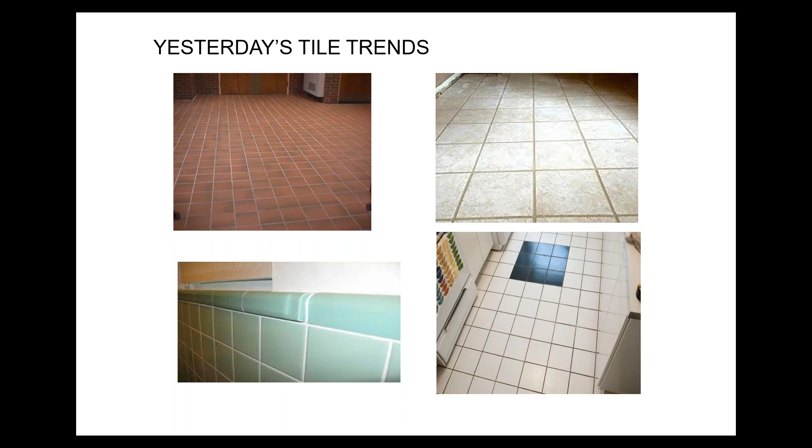When I got my start in our industry, tiles were much smaller. I remember our first 13 by 13 floor tile project, and we thought the designer and owner were out of their minds with these big tiles. Back then, all tiles were much smaller than we typically see today. The trend is to bigger and bigger tiles. We commonly see 24 by 24, 24 by 20, or 24 by 48, all the way up to these 5 foot by 12 foot and beyond.

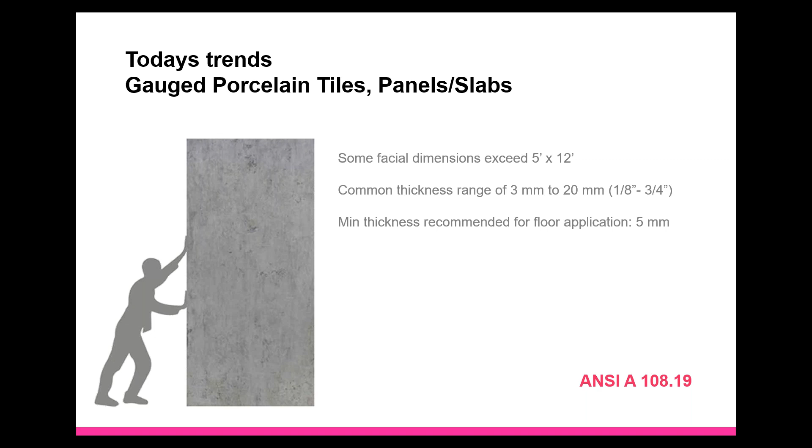Additionally, tiles are getting much thinner. As technology has improved, the prints are more realistic and the tiles, again, are getting much bigger. As these tiles get bigger, the need for a flat substrate is even more crucial. Recently, I dropped by an NTCA workshop where they were working with huge art glass panels. Imagine just how flat that substrate needs to be.

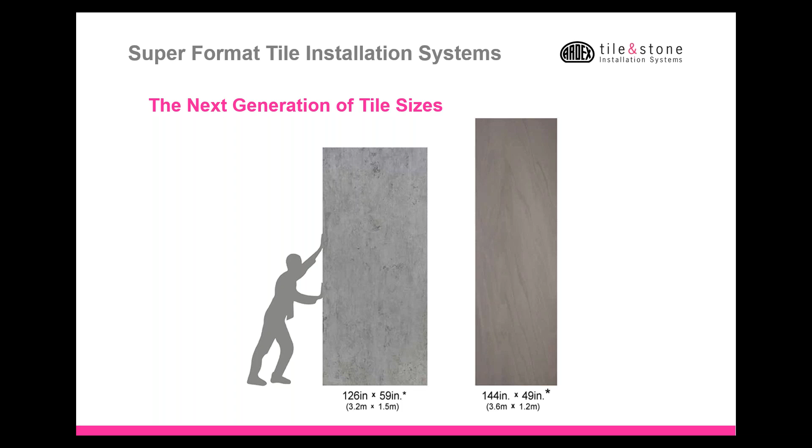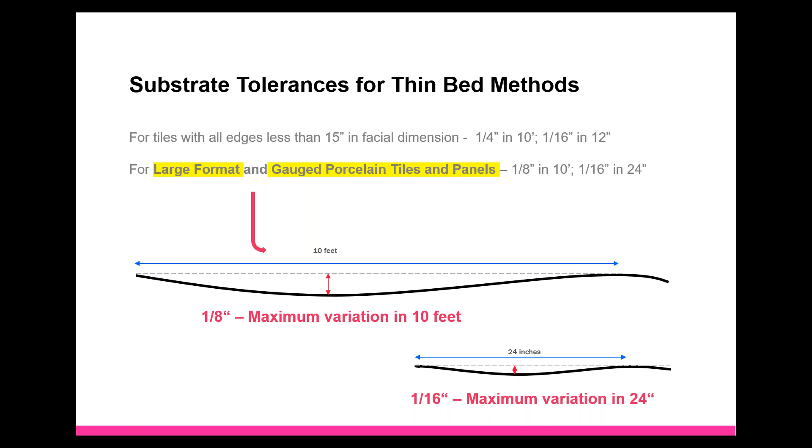Our standards tell us that we need a substrate flat to 1/4 inch in 10 feet, and for any tiles with an edge greater than 15 inches, which qualifies them as large format, we need our substrate to be within 1/8 inch in 10 feet. This refers to how flat our substrate is for both floors as well as walls. The reason designers and owners are going with these bigger tiles is that it's less grout, meaning less maintenance, as well as simply looking amazing.

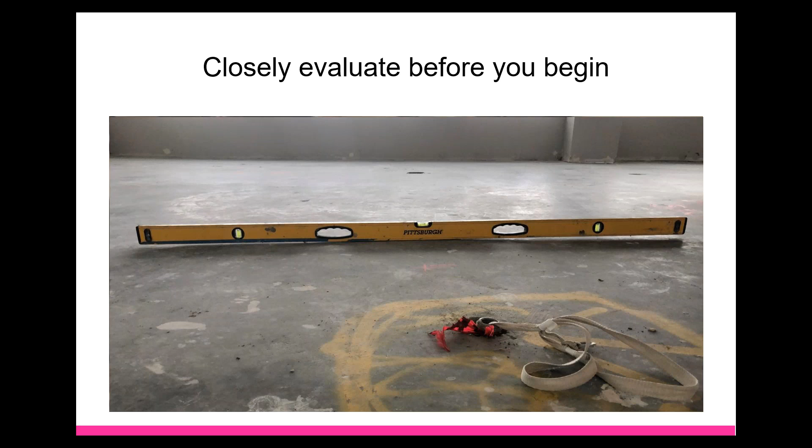By following proper prep guidelines, you will maximize long-term performance while reducing installation costs. More importantly, you will minimize costly callbacks and enhance your reputation as a quality installer. Because we've actually done proper prep, we aren't picking up and adding just a little more mud. We're able to spread our mortar and set tile.

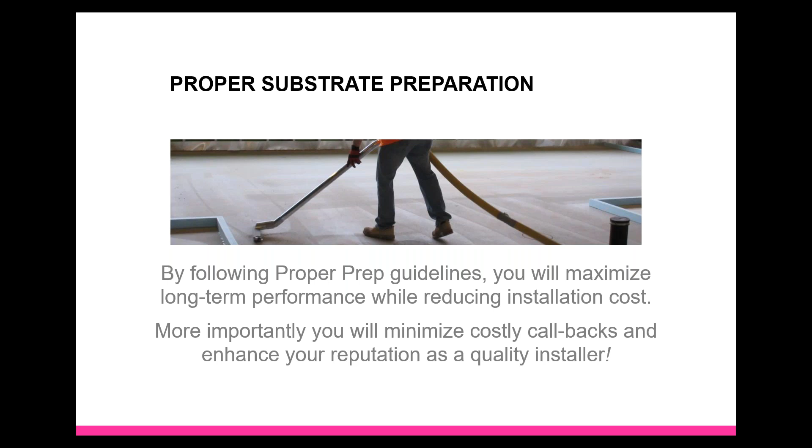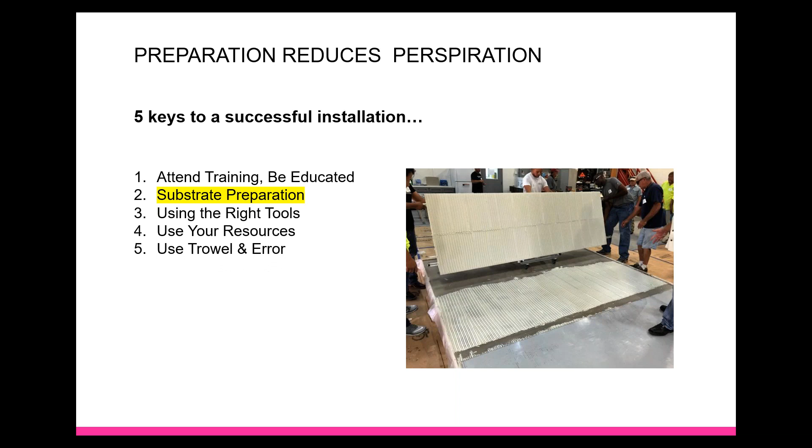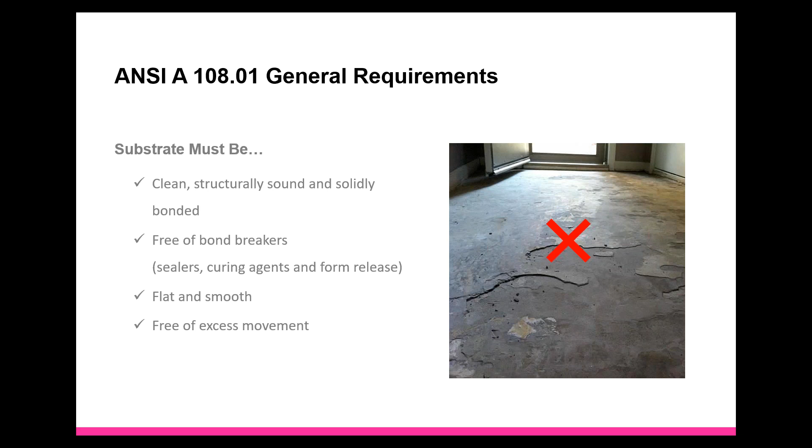The ANSI A108.01 general requirements state the substrate should be clean, structurally sound, and solidly bonded, free of any bond breakers, sealers, curing compounds, form release, flat and smooth, and free of excess movement. We need to get to a clean, sound, solid substrate. Any loose, weak, or soft top layer material will need to be removed. The most effective way to achieve this is by mechanical means, such as shot blasting, grinding, etc.

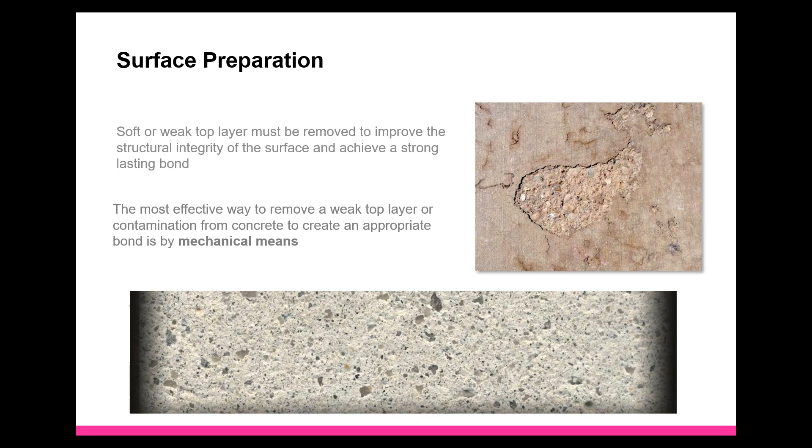In locations where we have contaminants, we must always remove these, such as release agents from tilt-up construction, paint overspray from painters, drywall mud and compound dropped on the floor, sweeping compounds, even oil or grease. Say the fire sprinkler guys were running their pipe threader and it dripped grease and oil all over the ground, as well as asphalt and tar.

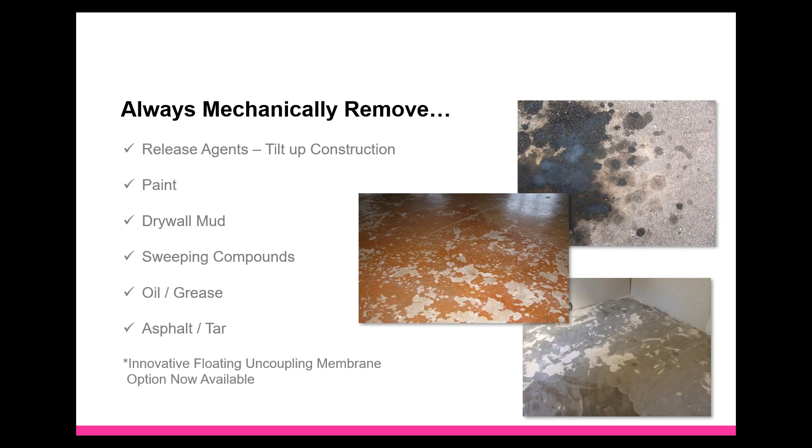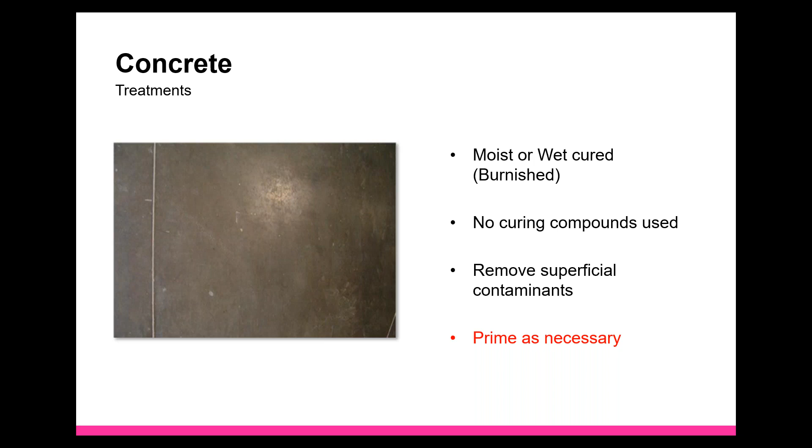In situations with new concrete, it should be wet or moist cured with no curing compounds used. We want to remove any surface contaminants, and a primer will be needed as necessary. If the concrete is treated with a sealer, we must determine what type was used. If it's an acrylic or epoxy sealer, we may just need to remove superficial contaminants and then prime as necessary. If it's a urethane type sealer, we need to remove it down to clean absorbent concrete and then prime as necessary.

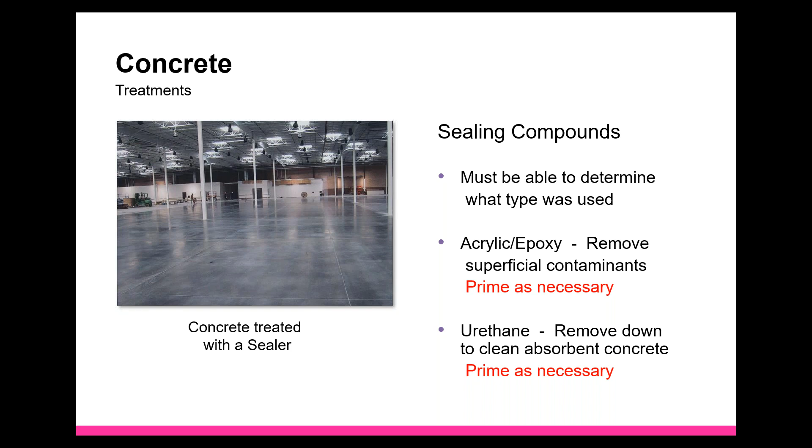The issue with sweeping compounds is that they are typically petroleum-based and or contain wax, which can leave a residue that is then a potential bond breaker.

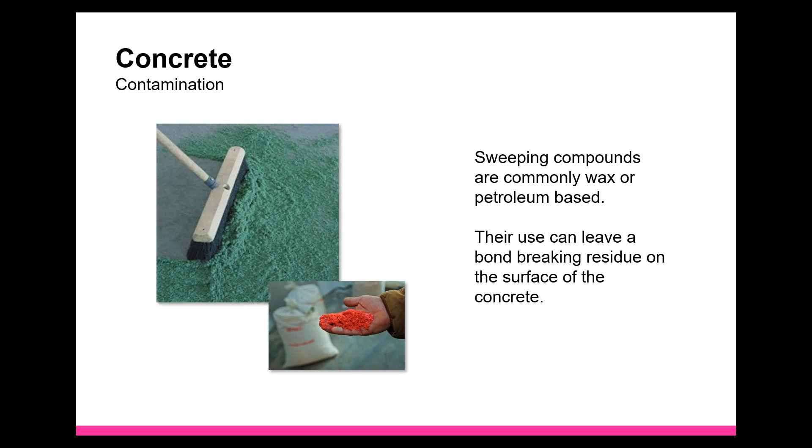Preparing a substrate that has existing adhesive residue. For example, say there was a different flooring that was removed and it left some of its glue behind. When we're directly on concrete, we need to scrape this adhesive down to a very thin layer without any excessive buildup.

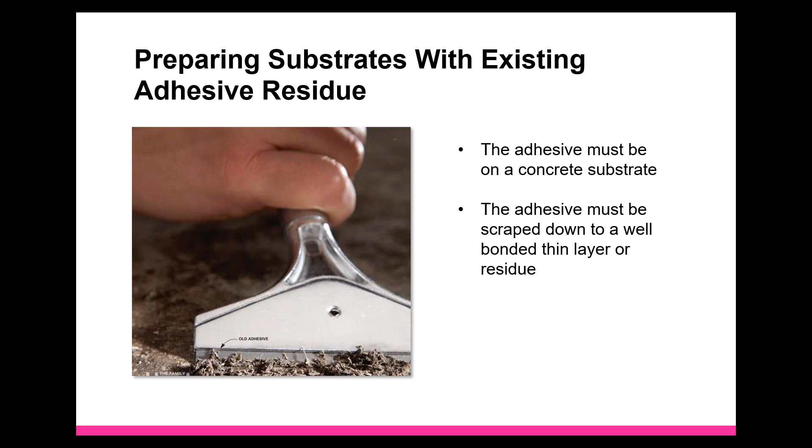So we do not want any adhesive removers. The issue with most adhesive removers is that they can penetrate down into the substrate and create contamination and bonding issues. If they soak into the substrate and eventually migrate back up to the surface, they'll continue to do their job, right? They're an adhesive remover. They'll continue to dissolve and affect our bonding primer that's used.

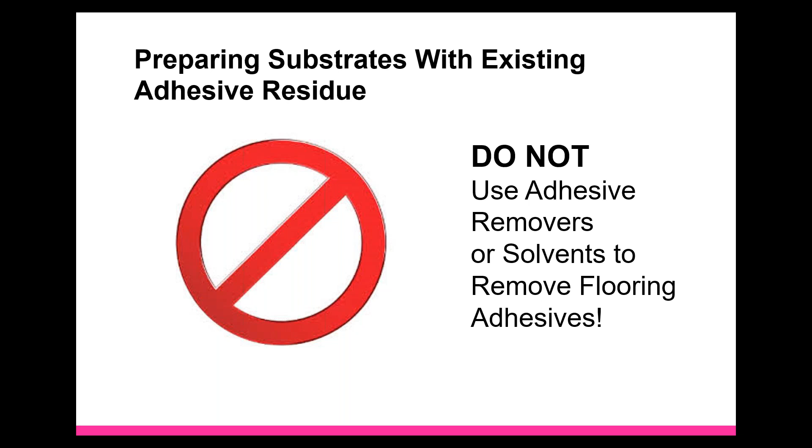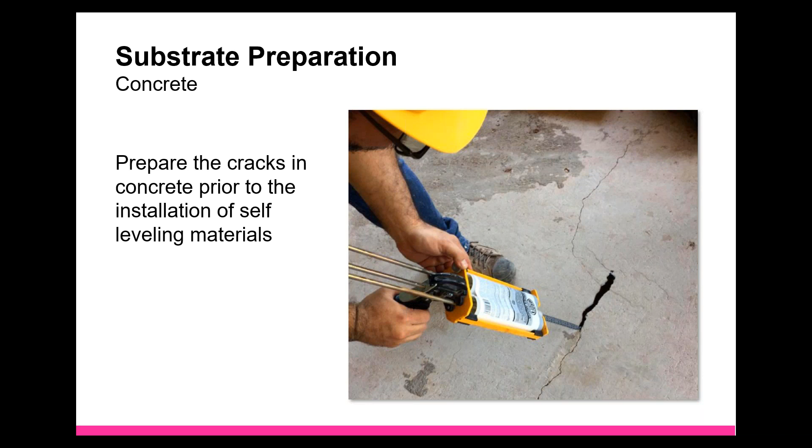Sometimes an overlooked part of proper prep is to repair existing cracks. Products like this two-part polyurethane repair compound, which are extremely fluid or have a low viscosity, allow them to flow deeply into the cracks. Crack repairs are incredibly fast. A product like this is done in as little as 10 to 15 minutes.

The application of both pourable underlayment and trowel grade underlayment products are not designed as a structural repair. These materials are surface repair products that prepare the substrate for the installation of finished flooring. Remember our ANSI 108.01 general requirements: we need to ensure that what we start with is clean, sound, and solid, free of excess movement.

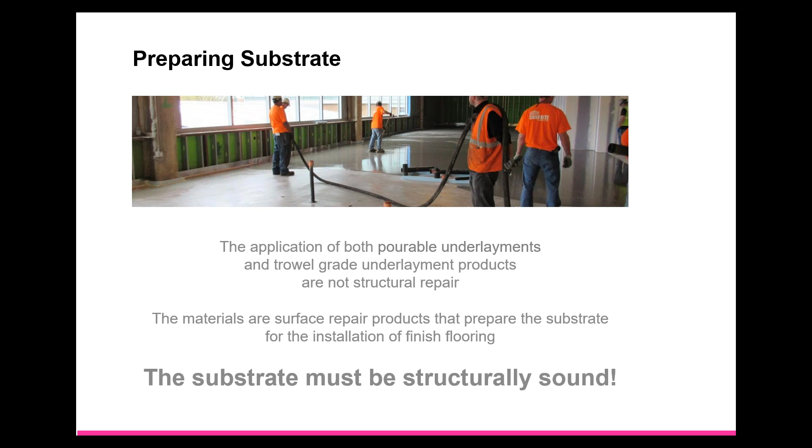Self-leveling underlayment, or SLU, has a new name: Flowable Hydraulic Cement Underlayment, per the ANSI 118.16 standard. For this presentation, we'll refer to it as FHCU, pourable underlayment, or simply underlayment. The reason being, these underlayments are not really self-leveling. They need to be moved around and worked at least a little bit for them to do their magic.

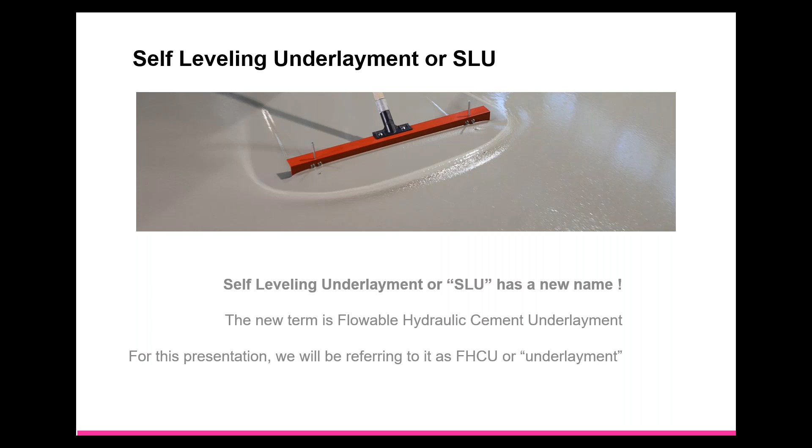So, flowable hydraulic cement underlayment versus a trowel applied or screeded patch. Several factors such as substrate, area of use, and depth of repair are just a few of the considerations when selecting a trowel applied repair or an underlayment.

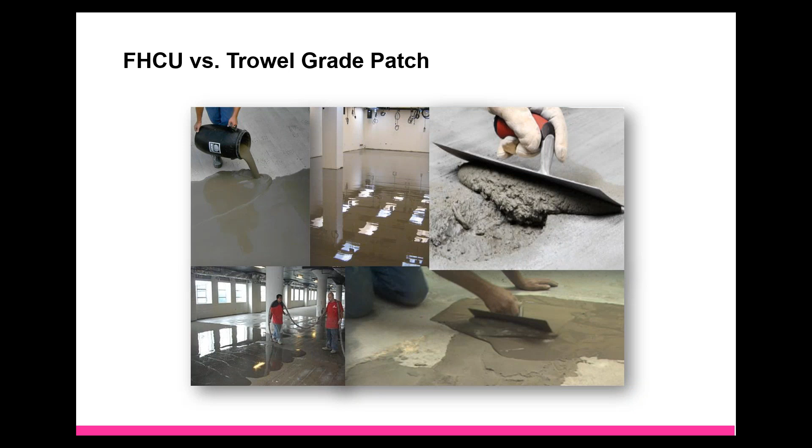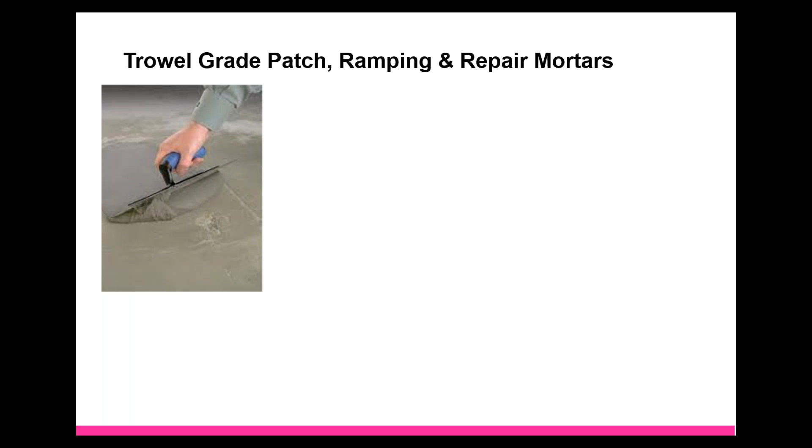There may be times when minor corrections can be made with a trowelable patch or even a ramping mortar, such as spalls in concrete, smoothing out existing tile, or addressing seams in a wood substrate. Other times, we may need to create a ramp, like a doorway going from an existing elevation, possibly going either up or down from there.

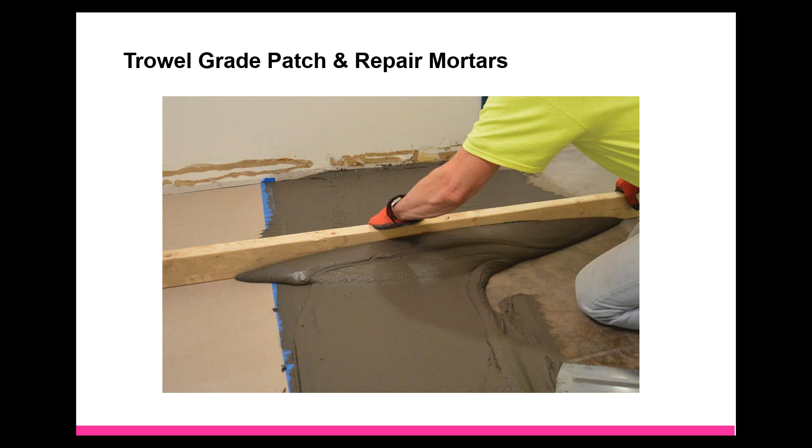Here we have a fireplace hearth that was in really rough shape. A pre-tile repair mortar was used to smooth the surface so the finished tile would then be flush with that of the hardwood.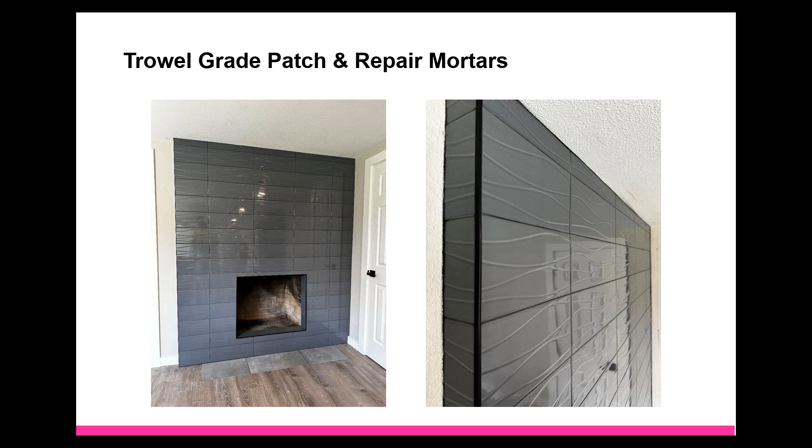When we have a wood substrate, many times it's necessary to fill the seams and any voids with a trowel applied patch to prepare it for the underlayment.

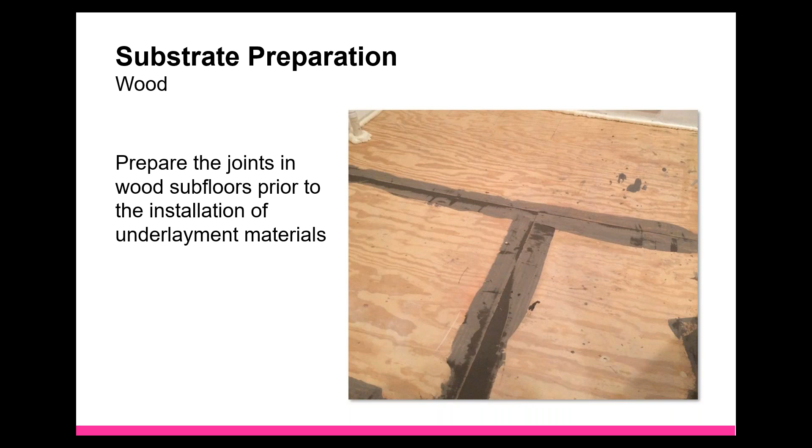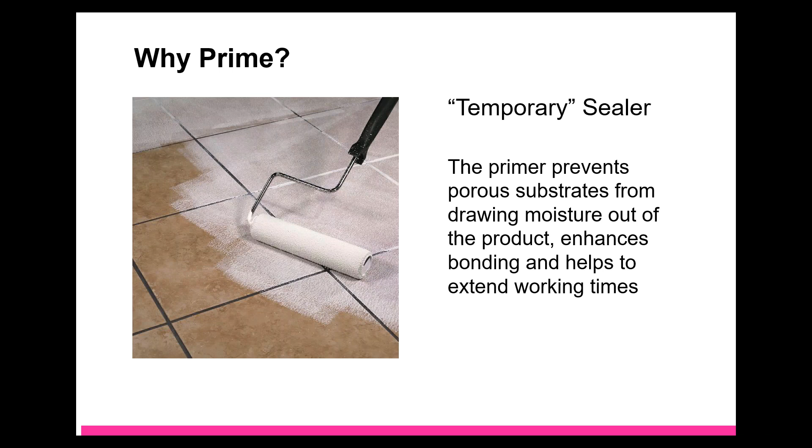Why prime? Primers do several things for us, such as prevent the substrate from pulling moisture out of our pourable underlayment, extend working times, and allow thinner pours. Additionally, they create a better bond to our substrate. Let's talk about that a little bit more.

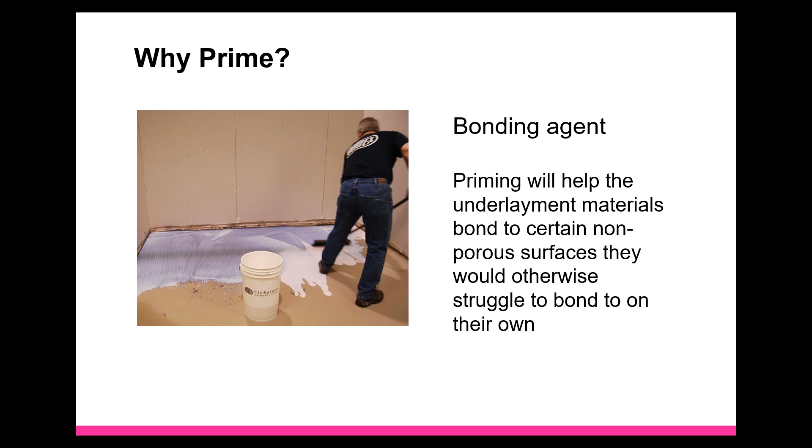Here they're using a flowable hydraulic cement underlayment directly over existing tile. In certain applications, this is perfectly acceptable with the right primer and right underlayment. This can reduce tear out and downtime due to demo.

Flowable hydraulic cement underlayments are blended polymer modified cements with high flow characteristics. Primers are typically single component acrylic or even epoxy. Keep in mind, most underlayments will require substrate priming. Pourable underlayments may be approved directly over wood substrates, metal substrates, and/or concrete. Always be sure to confirm with the manufacturer's technical data information.

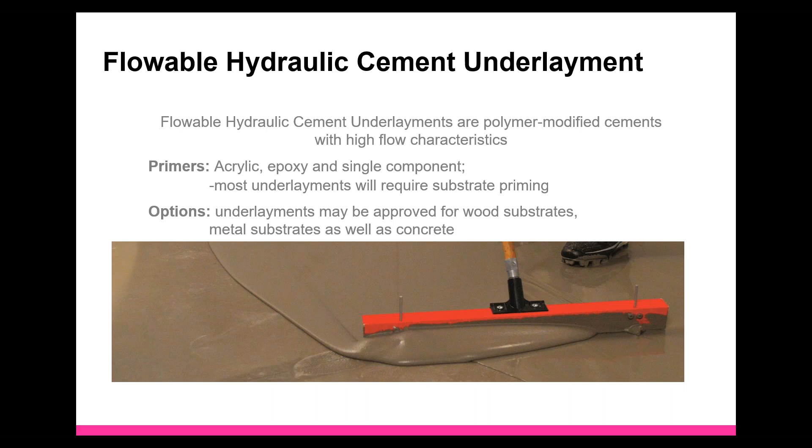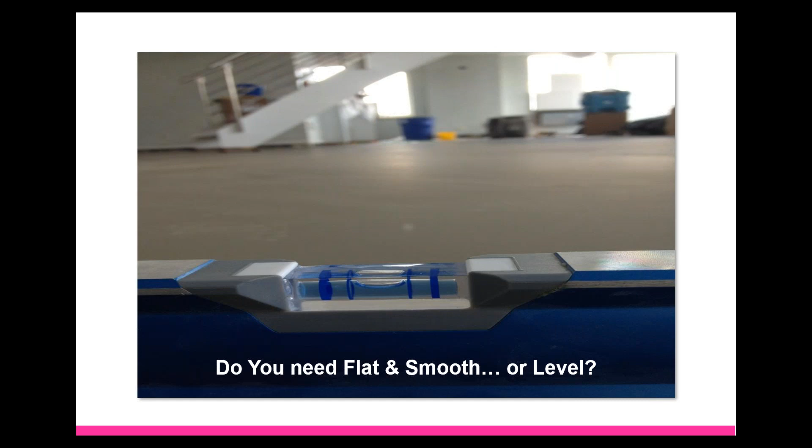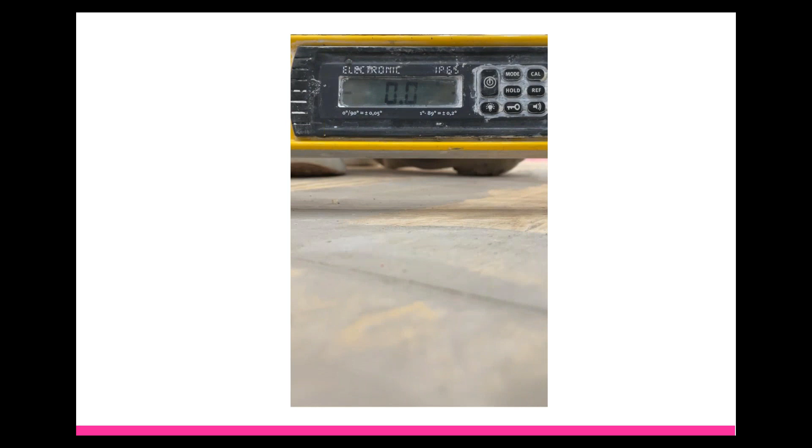Do you need flat and smooth? Or do you need level? Sometimes level may not be realistic with the thresholds of doorways, etc. So here we have a perfectly level surface, which is going to put us at least an inch off the substrate. In most cases, level isn't necessary. We're just looking for flat and smooth.

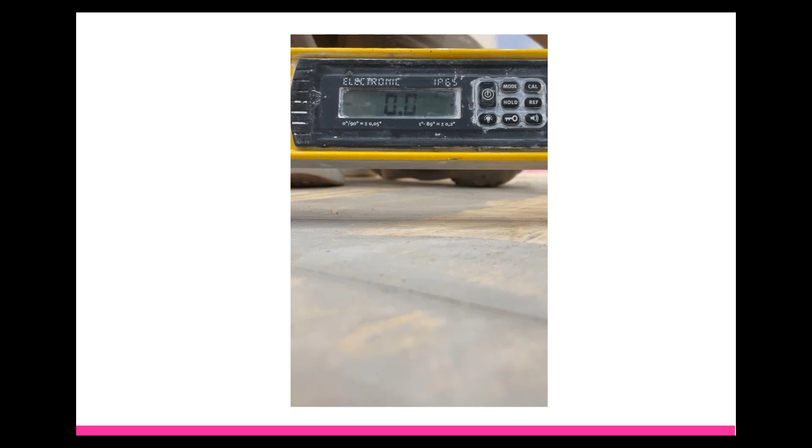So how do we know how much underlayment is needed? Minor corrections may only require an 1/8 inch to a 1/4 inch. Rougher substrates and extremely out of level applications may require 1/2 inch all the way up to 1 1/2 inches.

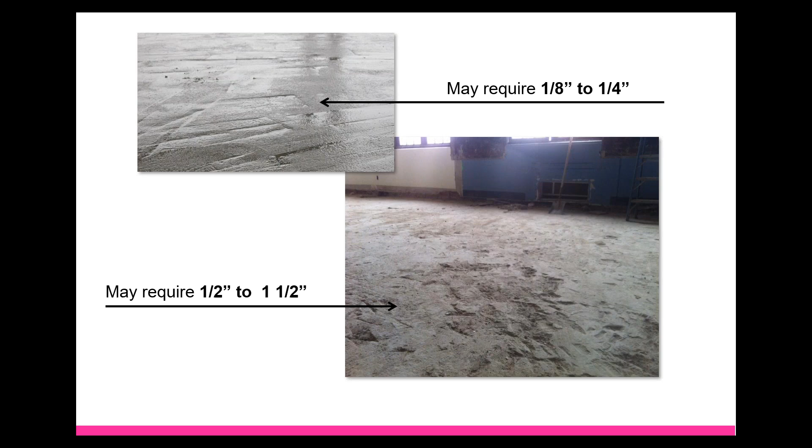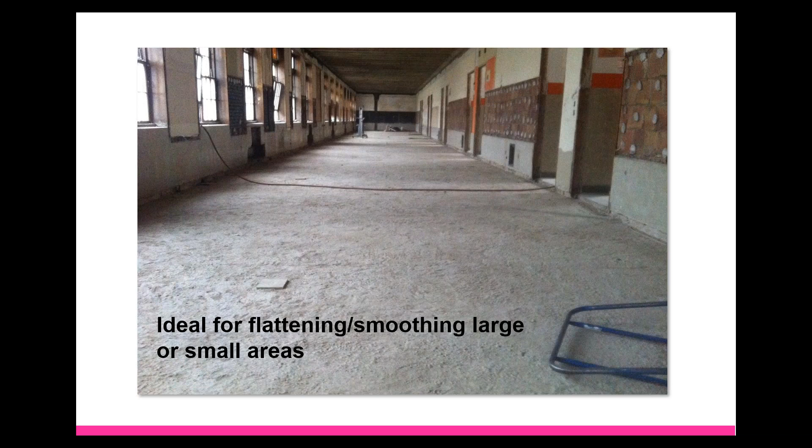Larger areas with deeper pours like this may benefit from products with longer open time and better heal between pours. These can be more forgiving in large areas, regardless of whether they're receiving large tiles or small. Think about that. Small tiles can telegraph improper substrate as they follow that substrate below, rolling along with it.

Flowable hydraulic cement underlayment for tile and stone installations can help save time and money by speeding up the installation and minimizing effort. On a perfect substrate, we're simply able to trowel out our mortar and set our tile.

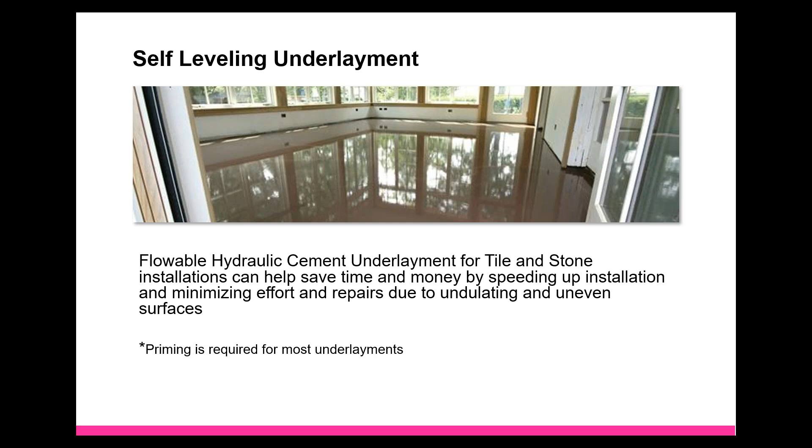High flow underlayments allow material to go thinner and smoother, requiring less work. Heal is the ability of one batch or pour to then be blended into the next batch, or even to fill in from walking across the material.

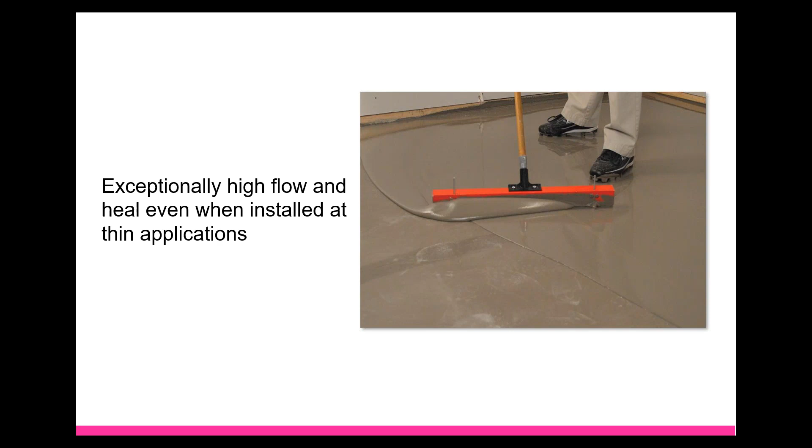Typically, we are going to wear cleats or spikes, such as photoed here. Even with complicated situations like with multiple rooms, they can all be tied together and be poured perfectly smooth. I mean, who wouldn't want to set on that surface?

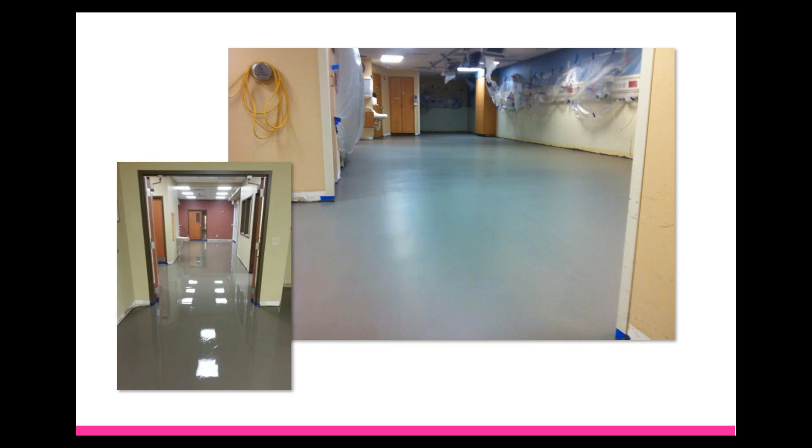It's super important to seal off all openings. We need to prevent any of the underlayment from flowing or escaping. This can waste material as well as cause serious damage. I have a story about Phoenix that I can share at the end of this presentation.

Several options can be used to seal the wall to floor connections, as well as around any penetrations like pipes, toilet fan flanges, etc. Adhesive perimeter expansion tape or even sill foam from framing can be used, and some people like spray foam. Myself, I'm not a fan of spray foam because it can be messy. If you've ever used it, you definitely don't want to get any of it on you.

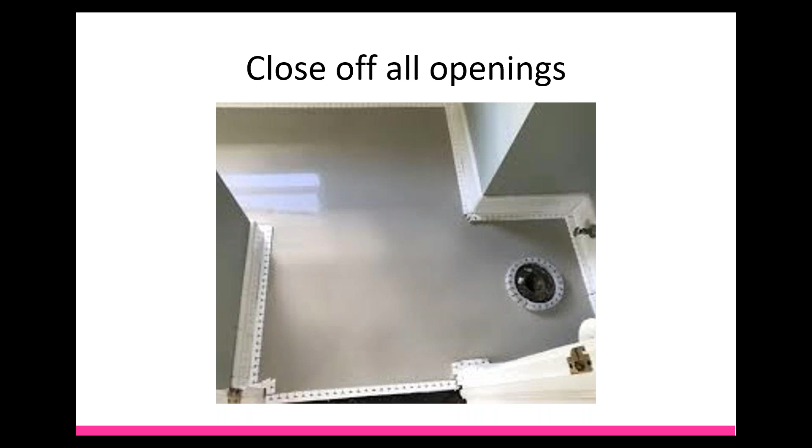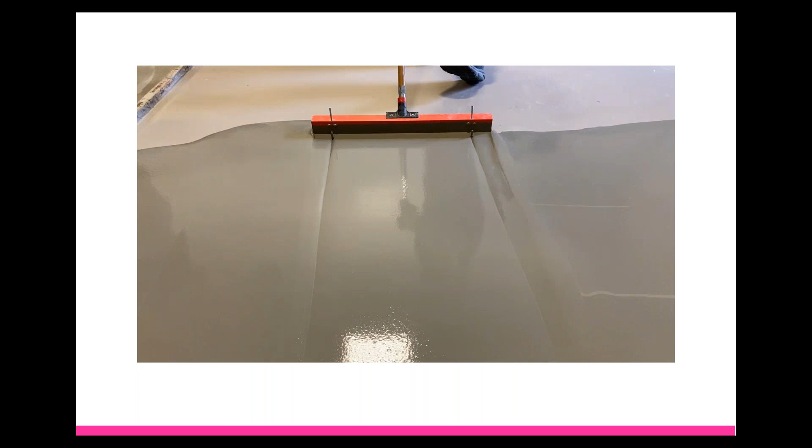Next, we have a couple of tools that are going to be used with these underlayments. A gauge rake is shown here and is a height adjustable tool that measures out a specific thickness of material. This can be set from heights from an 1/8 inch all the way up to 1 1/4 inches.

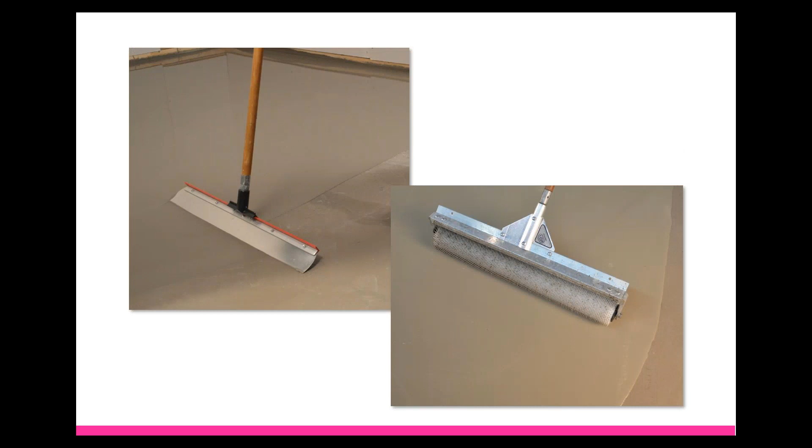Continuing on with our underlayment tools, we have the smoother and the spike roller. Both serve the same purpose, which is to break the surface tension of the underlayment. So while our pourable underlayment is very fluid, it's still a cement, which has more surface tension than even a drop of water. Breaking this surface tension allows the material to flow and even out.

Underlayments all have a specific water requirement. We cannot guess or eyeball these measurements. The use of smart buckets saves time by measuring the right amount of water, making every single batch exactly the same.

As a quick note, the mixing attachment, or the whip as I like to call it, is very specific to the brand of the barrel, because that contour is designed to match the contour of the barrel. So be sure to use the same brand as the mixing barrel, and don't use like your regular birdcage mortar mixer in there. It needs to match the barrel, and that also prevents any dry spots at the bottom.

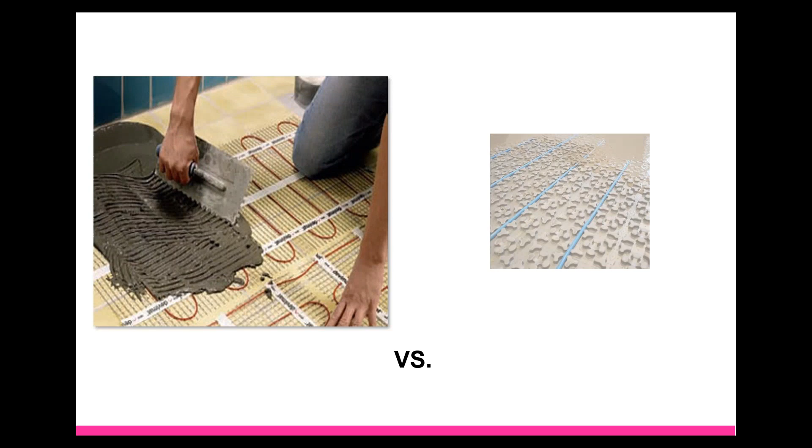Using a pourable underlayment over electric radiant heat wires is faster, creating a beautifully smooth substrate and protecting the wires from any potential damage, like the electrician or painters with their ladders on top of it, or even just dropping tools while walking across it.

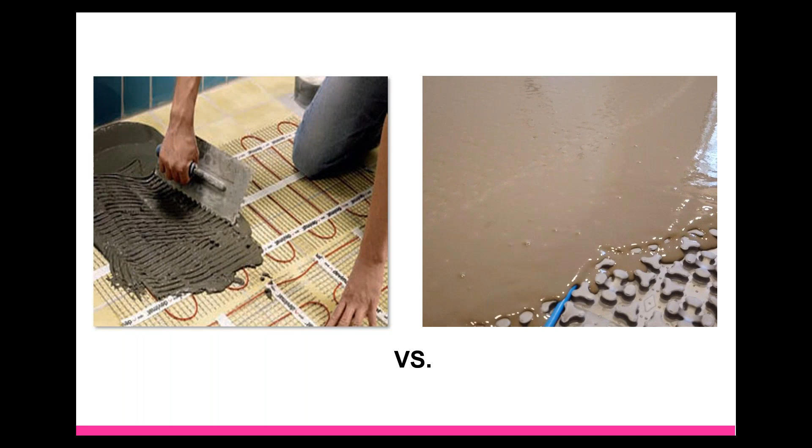Pourable underlayments are also ideal for going over hydronic tubing, such as pictured here. Always be sure the underlayment is approved for this type of application. I can speak from experience that not all underlayments are. It's always best to check with the manufacturer or the TDS.

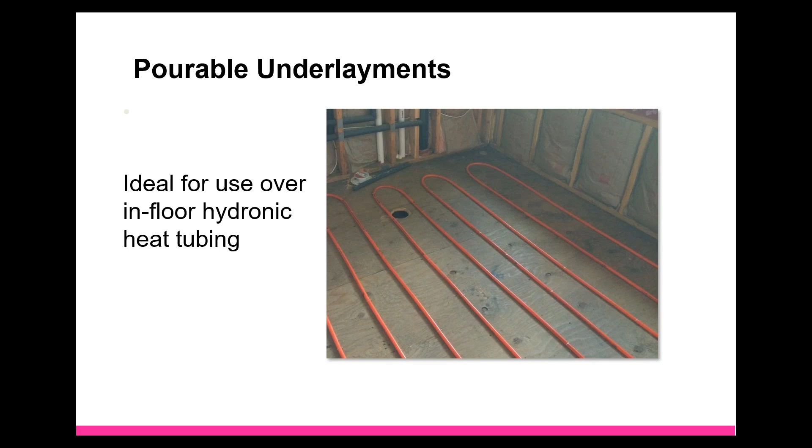When we have a flat substrate, we can simply trowel out our mortar and set our tile. Again, this is saving a huge amount of time during the installation and using less mortar. We aren't picking tiles up, making a mess just to add a little more mortar underneath the corner.

Backer board may not be flat. It's required to be fastened down to the substrate and therefore follows any highs and lows in the substrate, in the framing. Also, the mesh tape can create additional buildup at all the seams that may telegraph through the tile installation.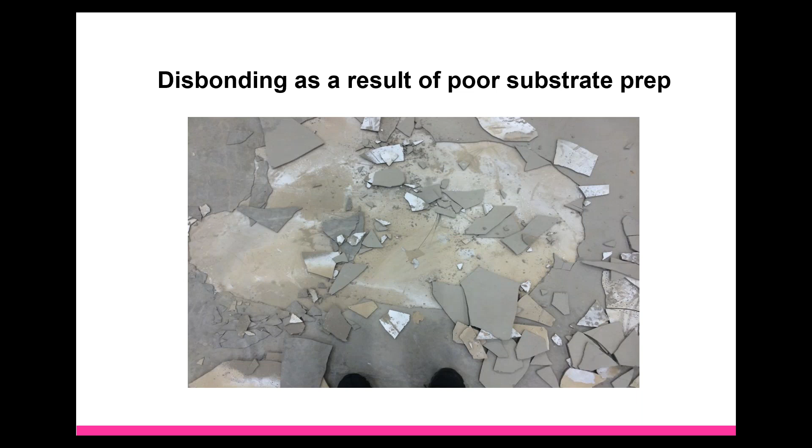There's always a right way solution. Stay in tune with industry trends and best practices. Be aware of inherent challenges. Use your resources, industry guidelines, manufacturer technical services, supply partners, even the NTCA trainings are a great resource.

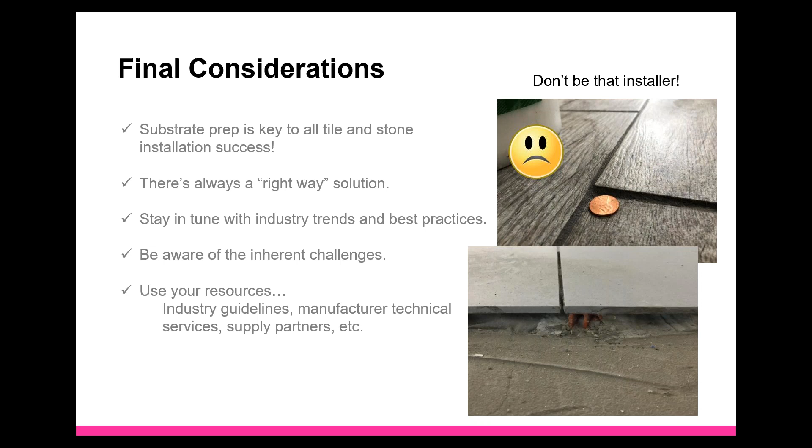The best practice is to be disciplined. Use our industry standards as a guide and do the right thing every time.

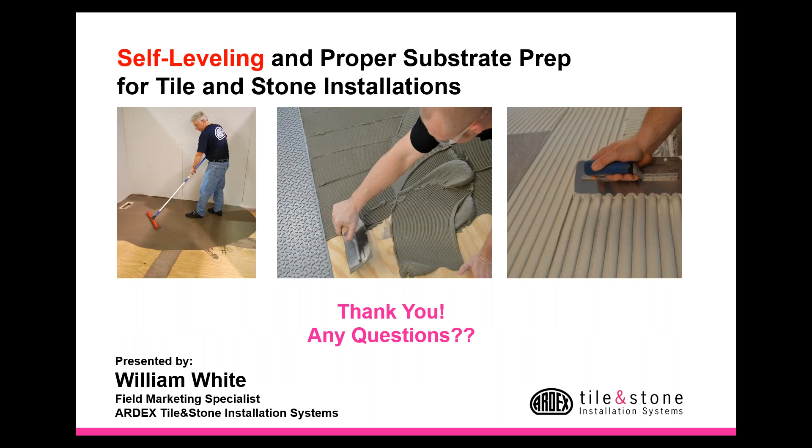And if we have time, I do have a story about that project in Phoenix as well. So while our audience is thinking of questions and typing them in, let's go to that Phoenix what could go wrong story. I'm sure we've all heard horror stories of what happens when you don't properly seal up the perimeter. Well, this happened to be a project in Phoenix. It was a master bedroom.

And they hauled all their stuff up. They primed their floor. They started mixing material and pouring it on the floor. And it just kind of seemed like it was seeking towards one corner, and they thought, oh, that's kind of weird, but maybe it's just a little low. They kept mixing up a little more and pouring it out there, and they were kind of working their way backwards.

All of a sudden the homeowner comes running up the stairs and she says, stop. You've got to stop. And they're like, no, we're almost done. Don't worry, we'll be wrapped up here. We'll be out of your hair in just a minute. She's like, no, it's leaking in the garage.

And the installer's like, oh, okay, I'll just send one of my guys down there with a bucket, and we'll just put a bucket underneath there and catch the little leak. And she's like, no, I need you to come look right now. And they all drop what they're doing and walk down to the garage.

Well, I guess it's a thing in Phoenix because it's hot that people put ceiling fans in their garage. Well, the can light was leaking the self-leveler onto the ceiling fan that was then spinning and flying around the room, and parked in the garage was a convertible Porsche with the top down. So the moral of that story is always double check your prep before you do a pour and make sure you've got everything sealed up.

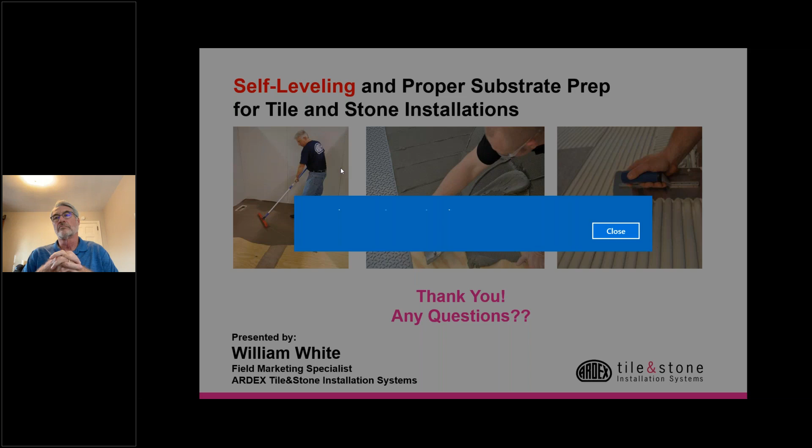Will, are you still there? Everyone, I want to thank you all for attending. We seem to have lost Will. Let's see, do we have another question here?

So we do have a question if there's multiple substrates like wood to concrete, and both need to be a uniform elevation. Again, I would talk to your manufacturer. I don't want to answer that, and we've lost Will here.